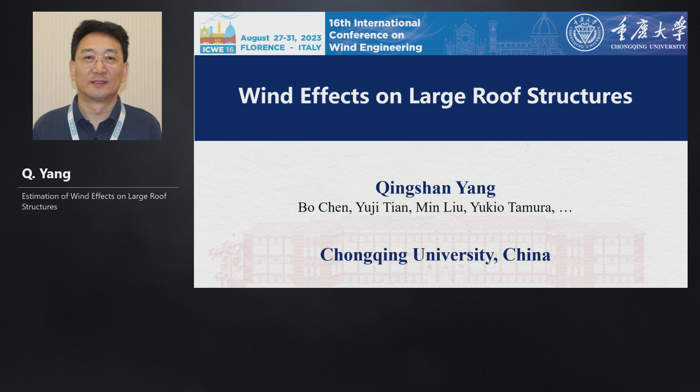The presentation will include 5 parts. Now let's begin from the background.

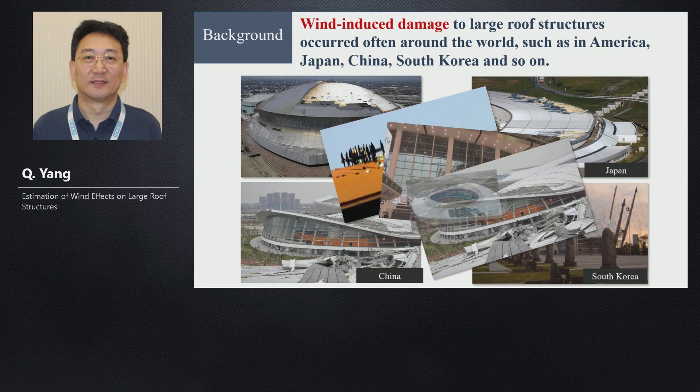Large roof structures such as sport venues, transportation hubs, and exhibition centers are widely built around the world. Wind-induced damage to this kind of large roof structure occurred often around the world, such as in America, Japan, China, South Korea, and so on.

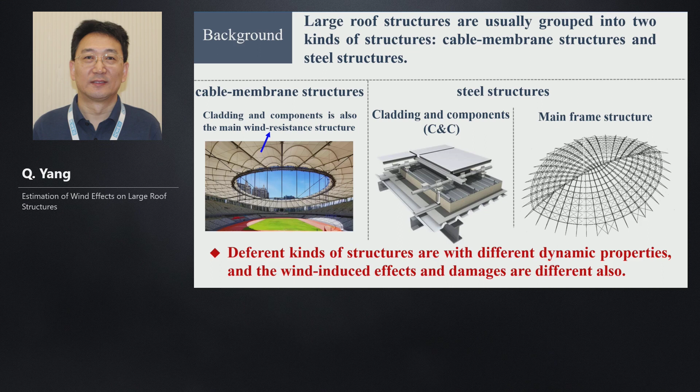Large roof structures are usually grouped into the cable membrane structure, which is a flexible, soft structure, and steel structures. The steel structure usually includes 2 parts: one is the cladding and components, and the main frame structures. Different kinds of structures have different dynamic properties, and the wind-induced effects and damages are different also. I will show you all of them.

The cable membrane structure is prone to be damaged by strong wind, and progressive damage usually occurs. It's believed that wind-structure interaction is a significant factor for the damage of the membrane structures, as it has low stiffness.

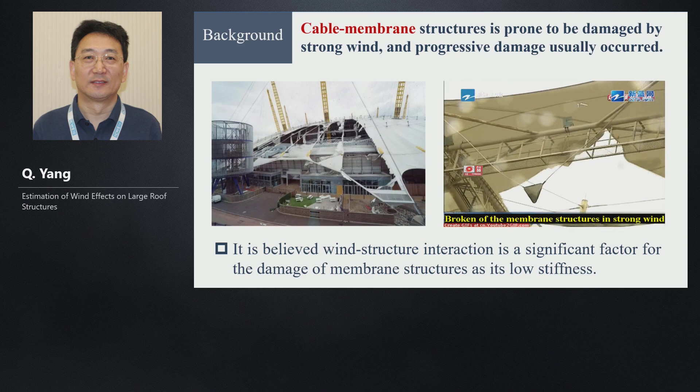For the roof cladding and components, wind-induced damage is very common, actually also very heavy. It's the main concern of the engineers. Wind-induced dynamic effect of the claddings can be ignored due to the high stiffness of the small-sized force-bearing unit.

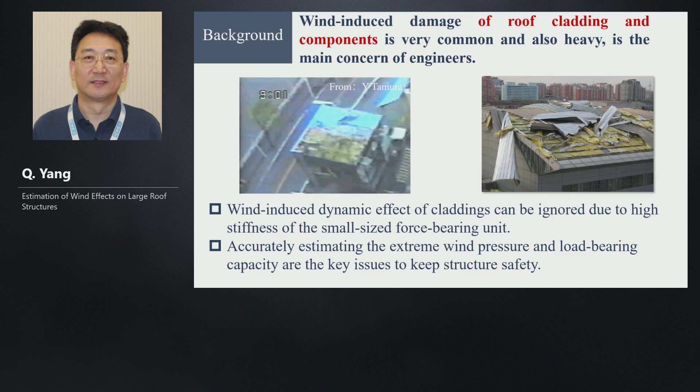So accurately estimating the extreme wind pressure and the load-bearing capacity are the key issues to keep the structure safe. For the main frames, the damage feature of this kind of roof is the over-limit vibration and sometimes even collapse. Wind-induced vibration effect needs to be considered in the design, and the design wind load is usually expressed as equivalent static wind load.

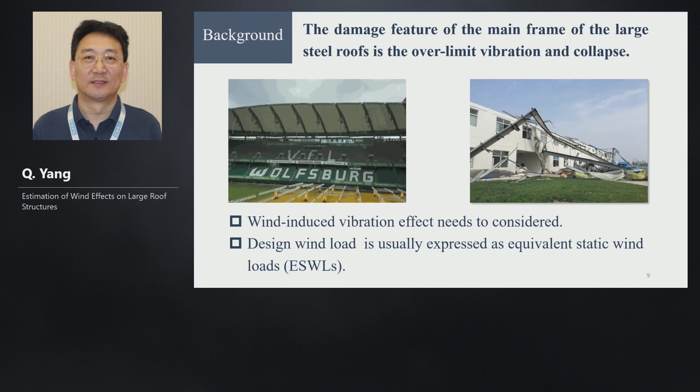From the background, we think there are some key issues that should be solved. Aeroelastic tests showed that the wind-structure interaction may lead the response to a sudden dramatic increase and modal jump. The underlying mechanism of the wind-structure interaction effects hasn't been cleared yet, and analysis methods haven't been found to be reported either.

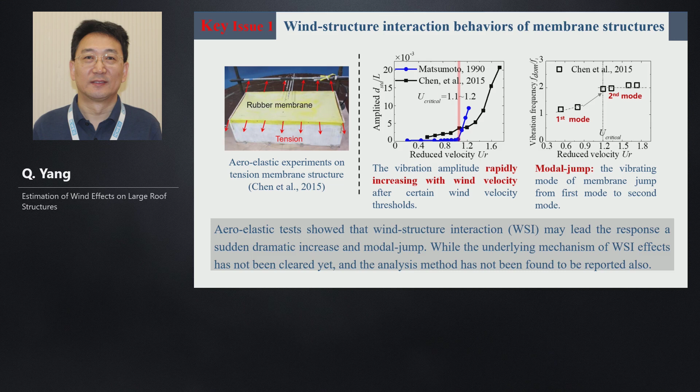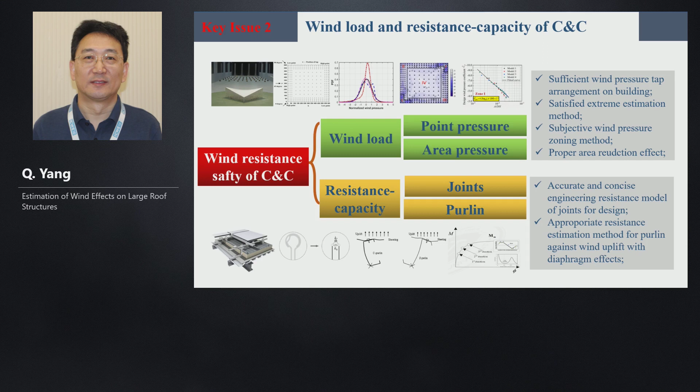For the claddings and components, to keep them safe, we should let the resisted capacity be larger than the wind load. For the wind load, we should examine or estimate the point pressures and the area pressures. For the resistance capacity of the cladding and the components, the main concern is the joints and the purlins.

For the point wind pressure, the extreme value of the point wind pressure, the layout of the pressure taps in wind tunnel tests needs to nicely capture the characteristics of the flow. Pressure taps are often arranged subjectively by experience in our wind tunnel tests, while quantitative criteria are needed for checking the rationality of the pressure tap arrangement and to reduce the pressure gradient of adjacent taps.

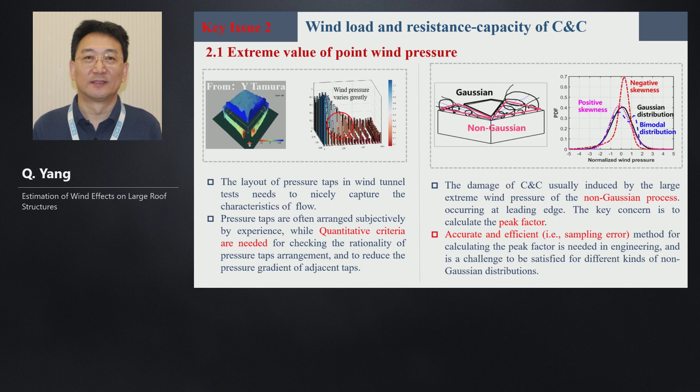The damage of the cladding and components is usually induced by the large extreme value of the wind pressure of the non-Gaussian process occurring at the leading edge, and the key concern is to calculate the peak factor. An accurate and efficient method for calculating the peak factor is needed in engineering and is a challenge to be satisfied for different kinds of non-Gaussian distributions.

For the area wind load of the cladding and components, the extreme wind pressure over all directions should be considered for the wind load on the claddings, which is usually especially unevenly distributed. An objective zoning method is desired to balance the safety and the cost.

Extreme wind pressure of the adjacent taps vary greatly with a big gradient occurring at different times. Both the correlation and the gradient should be considered for the area-reducing effects, while the influence of the gradient hasn't been studied enough so far, I think.

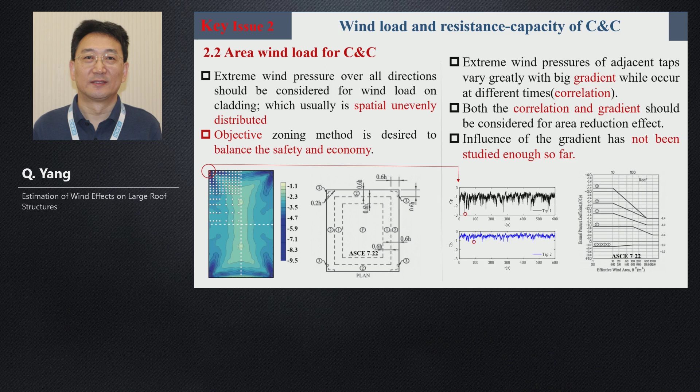For the wind resistance capacity, the metal envelope system is extensively utilized in large roof structures for its excellent waterproofing and convenient construction, etc. The claddings usually are composed of multiple layers of components and C or Z sectional purlins with complicated connections.

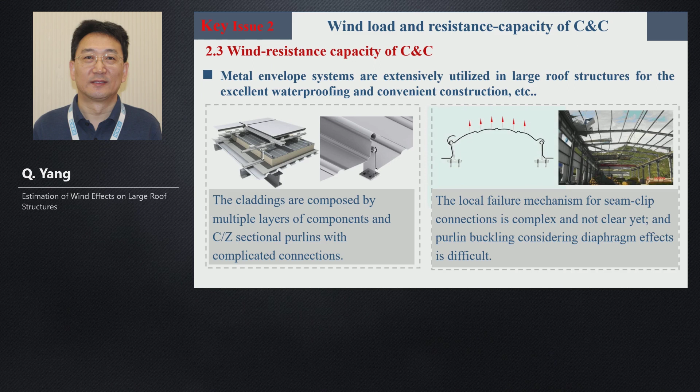So the local failure mechanism of the seam and clip connections is complex and not clear yet, and the purlin buckling, considering the diaphragm effects, is also difficult for engineering design.

For the main frame structures, there are many kinds of structures. Their characteristics of wind-induced response are much different, as their dynamic properties have a big difference, such as for the flat roof. For the flat roof, usually they have one dominant mode. For the cylindrical roofs, usually there are two dominant modes.

But for the dome roofs, we call it three-dimensional space structures. Each mode gives only a small contribution to the response. There are many modes that give contributions, so it's difficult to find the dominant modes. So a method analyzing wind-induced response of this kind of space structure is desired.

For this kind of space structures with low stiffness, low damping, and vibration with multiple modes, the dominant mode may appear in the higher order. Even the dominant mode gave a very small contribution—for this case, it is only 5%. So traditionally, the higher order modes are easily overlooked. It's necessary to select the dominant vibration mode to calculate the wind-induced response with high efficiency.

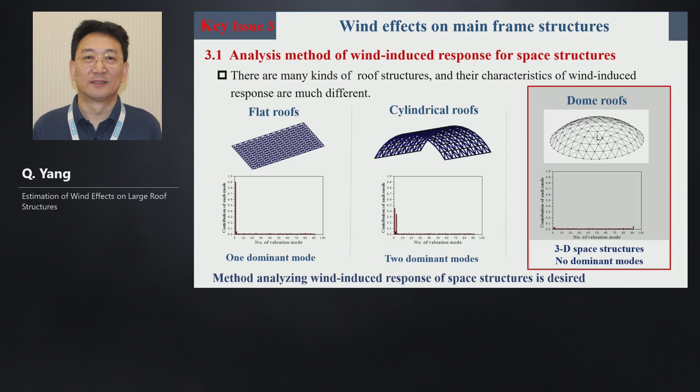Yeah. Next is for the equivalent static wind load. Sorry.

This is for the equivalent static wind load. The number of equivalent targets of the space structures is usually big, and the number of equivalent static wind loads are also big, which makes the engineering design very inconvenient if the single target equivalent static wind load method is adopted. So the universal equivalent static wind load is needed very much for large space structures.

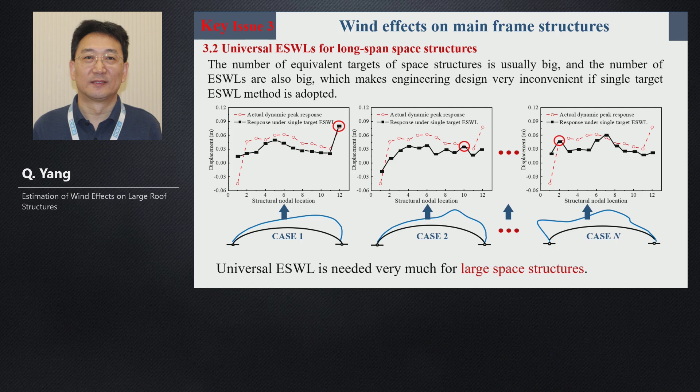So I will, in the following three sections, focus on these issues one by one. First, I will introduce wind structure interaction of membrane structures. To reveal the interaction mechanism of wind and membrane structures, the aeroelastic appearance is accurately reproduced by fully coupled numerical simulation. The wind-induced response of the tension membrane is accurately simulated, and the mode jump phenomena of the membrane structure is also reproduced in the CFD analysis.

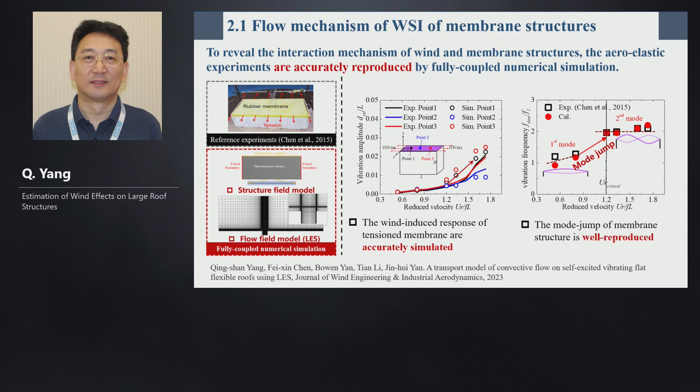From the CFD analysis, it is found that when the wind load or wind velocity is low, the shedding and convection of the vortex above the membrane surface are stochastic and irrelevant to the vibration itself. But when the speed increases, after the mode jump occurs, the vortex shedding becomes resonant with the vibration, and the vortex convection is synchronized with the uplift motion. Yeah, maybe you can see that.

This point always, the vortex coincides with the uplift of the membrane motion. That indicates that the wind-induced vibration of the membrane structure is a kind of vortex-induced vibration.

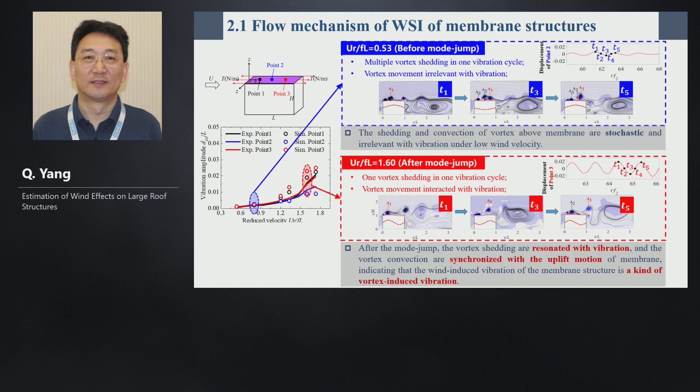Furthermore, the wind structure interaction effect of three-dimensional membrane structure is also analyzed. From the result, it is shown that the wind pressure in the middle area is significantly increased due to the existence of the wind structure interaction effect, which is much bigger than in other areas.

The separated vortex, which formed at the leading edge above the rigid structure, may shift toward the middle or trailing zone for the vibrating structure. This is the reason that caused a notable increase in the wind pressure.

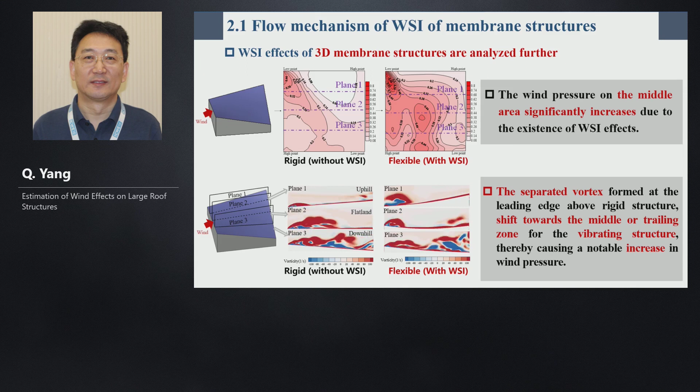To establish the wind-induced response analysis method considering this kind of wind structure interaction effect, the motion-induced aerodynamic forces should be identified. This kind of motion-induced aerodynamic force, as all of you know, is usually expressed by the aerodynamic force, damping, and stiffness. The aerodynamic damping and aerodynamic stiffness may be identified based on the forced vibration method.

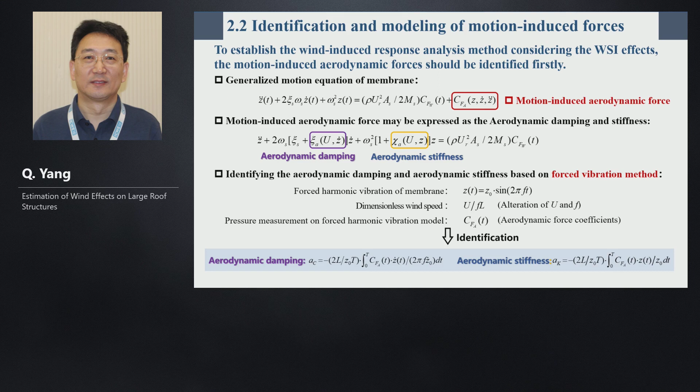This is the result of the identification. We can see that the aerodynamic stiffness is constant at a given reduced wind velocity, with no relation to the response. Correspondingly, we call this a linear aerodynamic stiffness force, which can be directly substituted into the motion equation. The aerodynamic damping is positive at lower reduced wind velocity, which will decrease to negative at higher reduced wind velocity. So the aerodynamic damping is a nonlinear function of the amplitude.

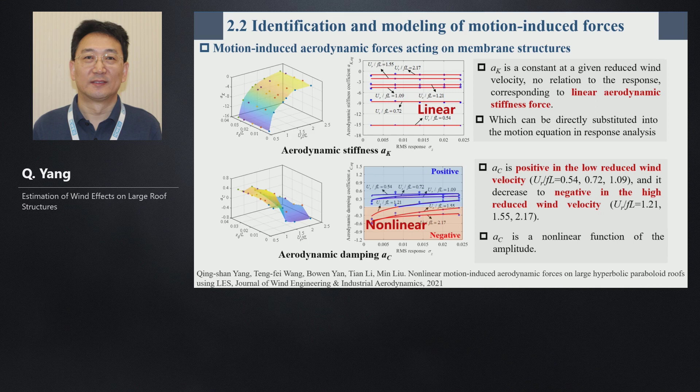To analyze the structural response, an appropriate model describing the nonlinear relationship between the aerodynamic damping and the structural response is needed. It is found that this kind of nonlinear aerodynamic damping may be modeled by the generalized van der Pol model, proposed by our group.

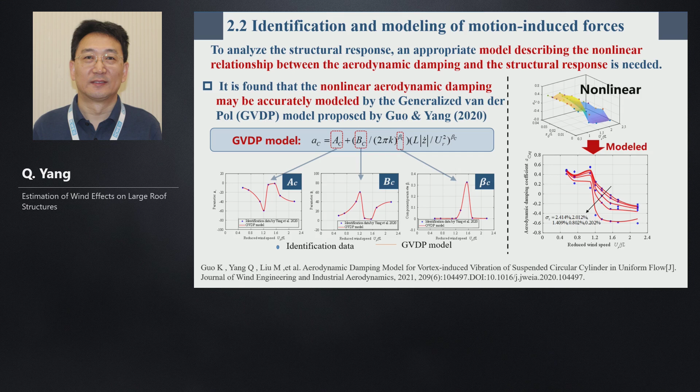The response of the membrane structure with nonlinear aerodynamic damping is usually unsolvable, but we can transfer it to a solvable nonlinear system, such as the FPK function. If we do so, we can obtain the probability density function of the structural response. If we get the PDF, then the standard deviation, kurtosis, peak response, and peak factor can be calculated.

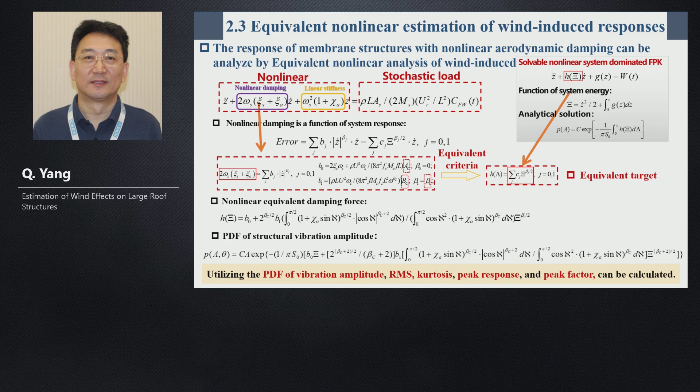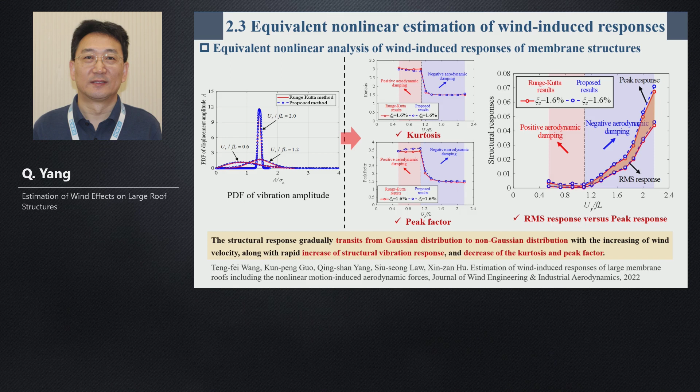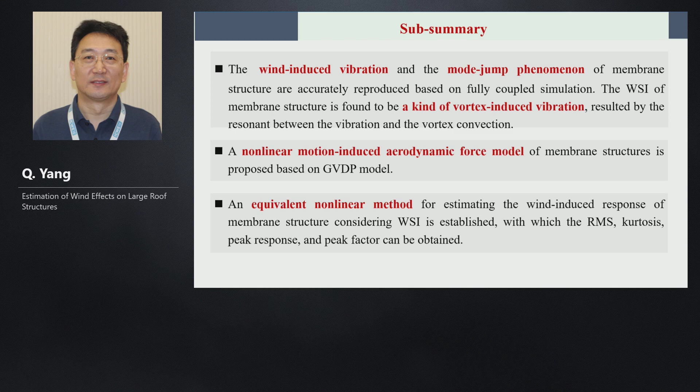This is what we have done on membrane structures. I want to give a short summary. The wind-induced vibration and mode-jump phenomenon of the membrane structure are reproduced based on the fully coupled simulation. The wind structure interaction of the membrane structure is found to be a kind of vortex-induced vibration. A nonlinear motion-induced aerodynamic force model of the membrane structure is proposed based on the generalized van der Pol model. An equivalent nonlinear method for estimating the wind-induced response of the membrane structure, considering wind structure interaction, is established.

This kind of research result we applied to some engineering projects. Actually, we directly did the consulting work for more than 30 membrane structures, including some important and large projects.

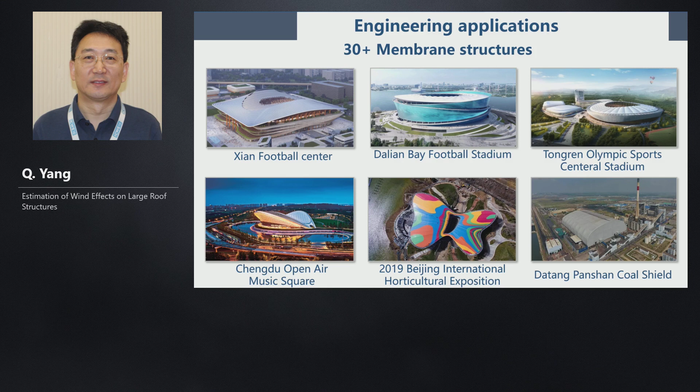Next, we go to the cladding and the components.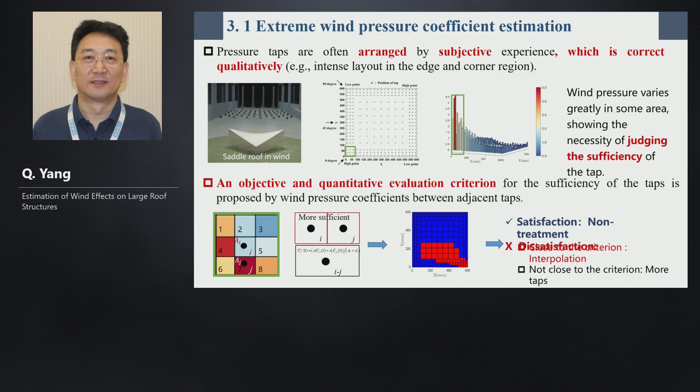For the part that can be interpolated, the kriging method and the POD method, for example, can be applied respectively to interpolate the mean wind pressure coefficient and the fluctuating wind pressure coefficients. For the interpolation, an adaptive interpolation method is developed to arrange interpolation points according to the wind pressure difference between the adjacent taps, to meet the sufficiency requirement of the pressure points. Here we show some of the results.

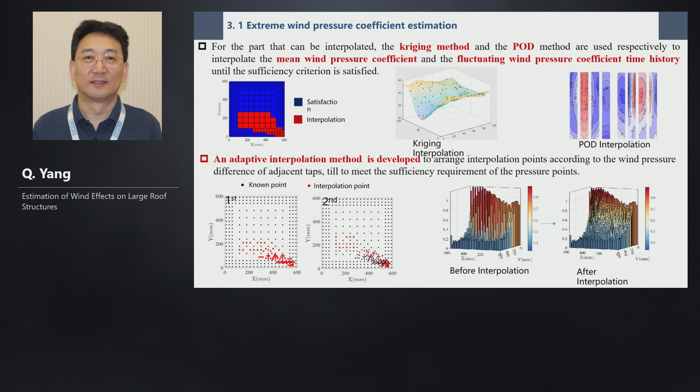After we get the time history of the wind pressures, the extreme value of the non-Gaussian wind pressure coefficient can be estimated by type 1 or type 3 distribution. If the time history is long enough, more efficient ways with a short time history are also proposed by pioneer researchers.

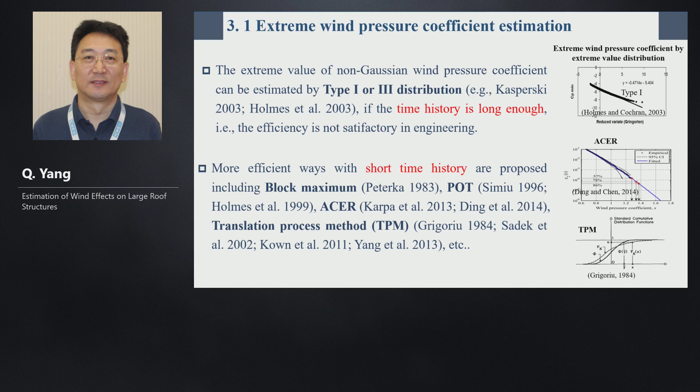The translation process method based on the peak factor of Gaussian process is widely applied. The moment-based Hermite model of the translation process method, based on the first 4 moments, has been widely studied. Its accuracy sometimes, in some cases, is not satisfied, and the sampling error exists but is not known yet.

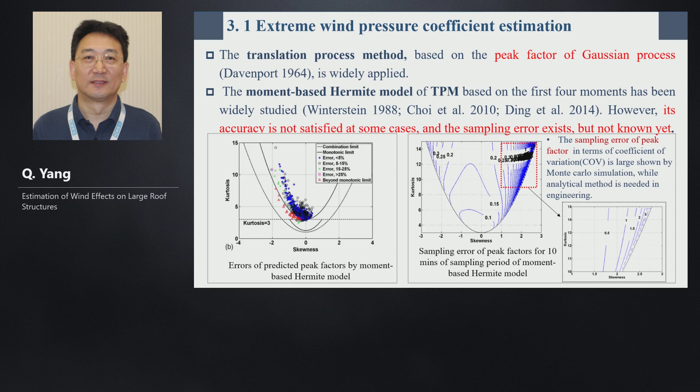So we did some further analysis on the PDF of the pressure process. We find the tail, because we concern the extreme value, so the tail of the probability density is very important to us, is sensitive to the skewness in different ways for the left and right side tails. When the skewness is less than 0, the skewness will control the right tail, and the left tail is not sensitive to it. When the skewness is bigger than 0, the skewness controls the left tail, and the right tail is not sensitive to it.

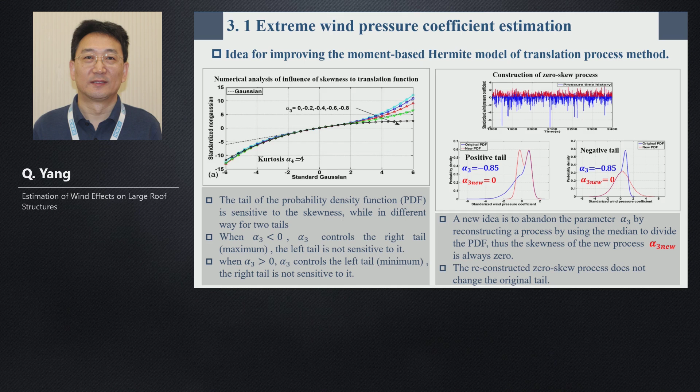So after this kind of consideration, the idea is to abandon the parameter skewness by reconstructing a process, using the median to divide the PDF. Thus, the skewness of the new process is always 0. The reconstructed zero-skewed process doesn't change the original tail property. If we use the newly constructed process, we can get a much better result compared to the original process.

This is the error by the original process. They have a big error in this area. This is for the reconstructed process. The higher errors are eliminated, and all of them have a great improvement.

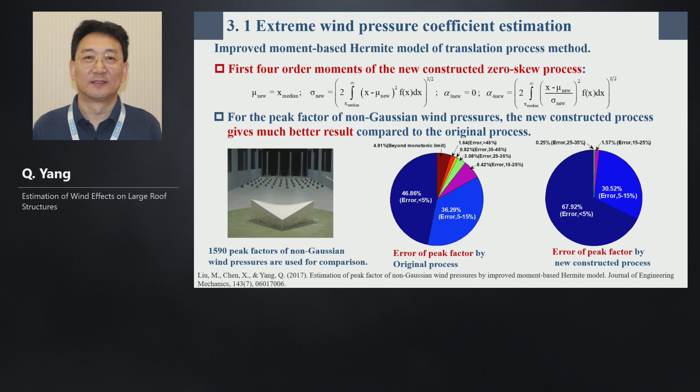For the sample error of the estimated peak factor, it may be represented by the coefficient of variation of the peak factor. Actually, traditionally, the controlling parameters were given only for white noise process. But the pressure process is not white noise, it is correlated. So we propose a method for determining the control parameters for this kind of wind pressure process, considering the autocorrelation.

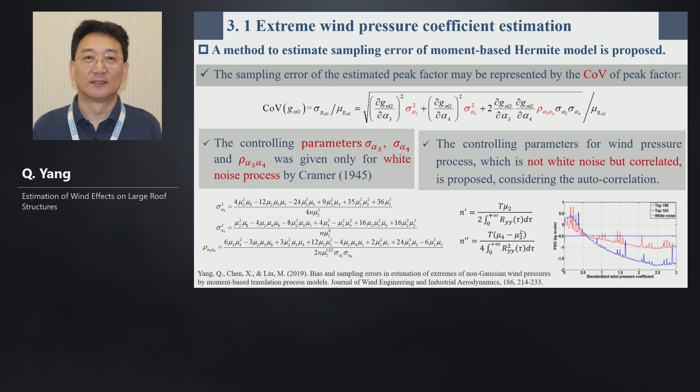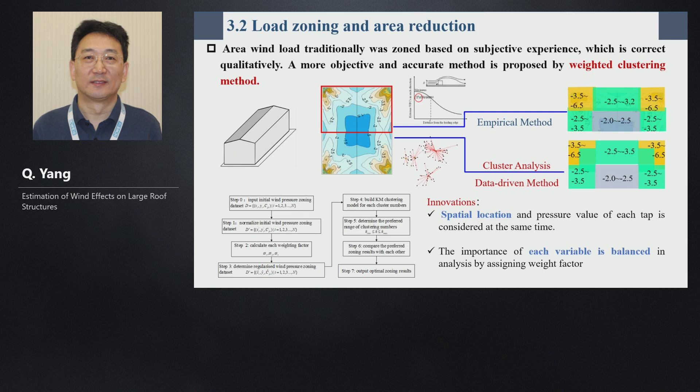Compared to the empirical zoning method, the proposed method may give objective results quantitatively for both simple and complicated pressure distributions.

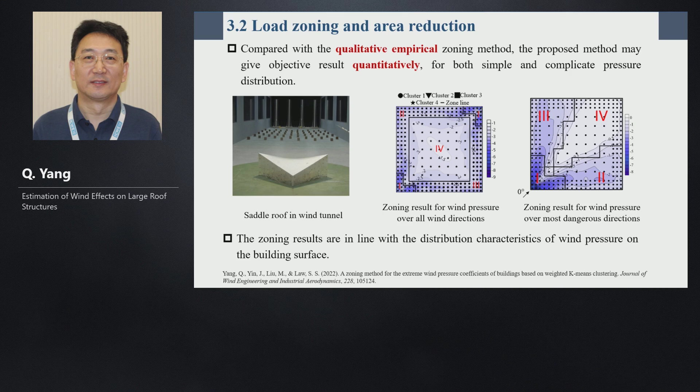The influence of both the gradient and the correlation of the pressure on the area reduction effect can be effectively taken into consideration by interpolation. The procedure is the same, but using a more dense pressure value gives a more accurate result.

This slide shows an area reduction curve, which differs with and without this kind of interpolation. It is found that the traditional method underestimates high pressure in some small areas, and overestimates low pressure for the big areas. This leads to a very bad design, which is expensive and sometimes also dangerous. So using interpolated data is very important, we think.

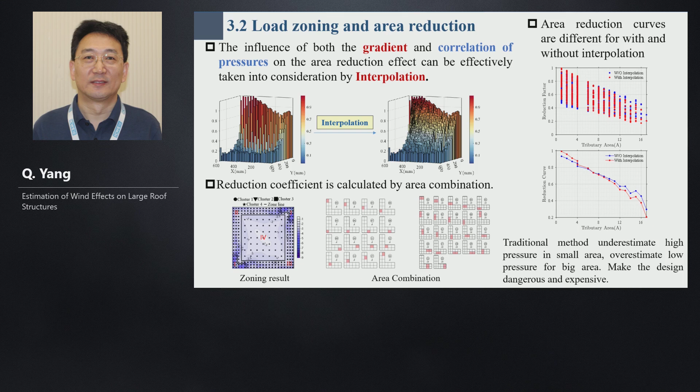For the resistance capacity of the joints of roof claddings, the wind-induced pull-out failure of the standing seam metal cladding system is sketched in this figure. It is shown that the seam clip connection is the most susceptible part to the wind uplift effect, and there are two failure modes: the seam clip failure and the seam-to-seam failure.

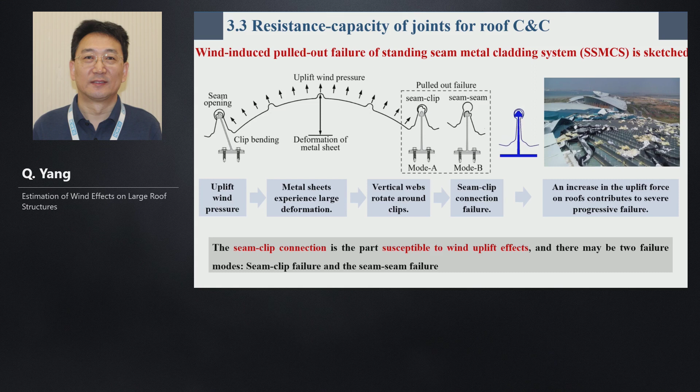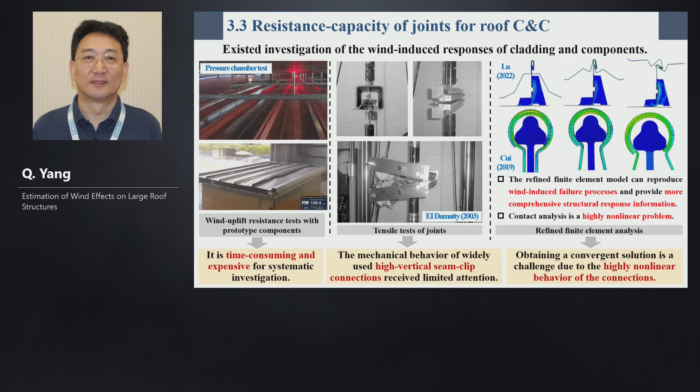There are many researchers and investigations on this kind of wind-induced response of cladding and components, through pressure tests, wind tunnel tests, joint tests, and also refined finite element analysis. But we think there's still some work that needs to be done.

An equivalent spring model was developed for this kind of cladding to simplify the highly nonlinear contact boundary condition, based on the pull-out failure mechanism. The developed model, comprising continuous rotational and horizontal springs, was employed to simulate the mechanical performance of seam and clip connections.

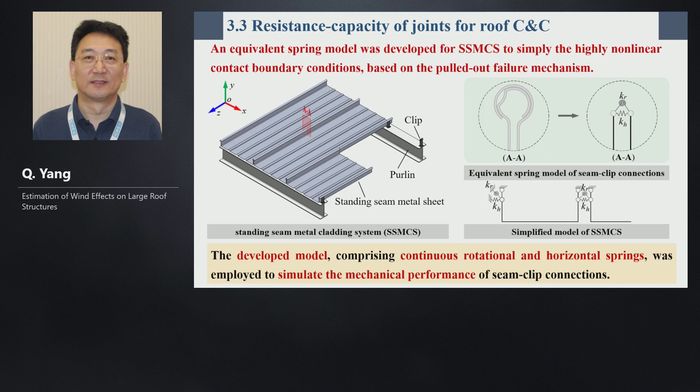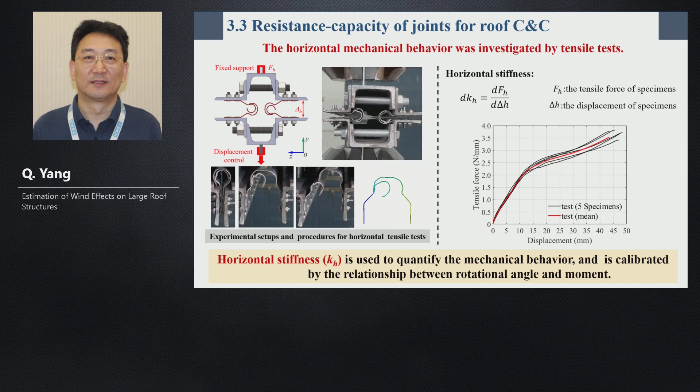Here we get the horizontal mechanical behavior by tensile tests. By this kind of test, we can determine the horizontal stiffness, which can be calibrated through the relationship between the rotation angle and the moment. In the same way, we can also get the rotation stiffness.

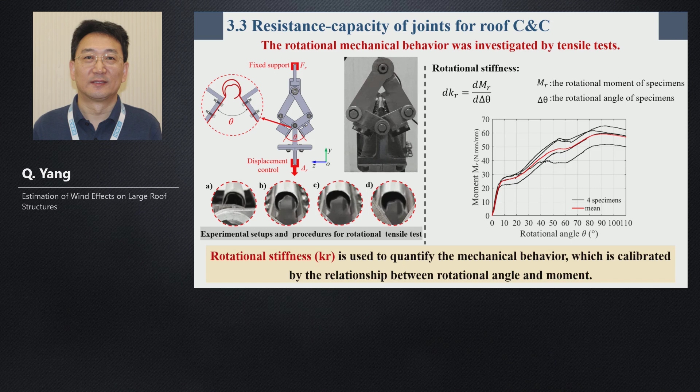The equivalent spring model of the seam clip connection was validated by substructure tests. From the tests, it is confirmed that the developed model for evaluating the structural response of the system is feasible and accurate.

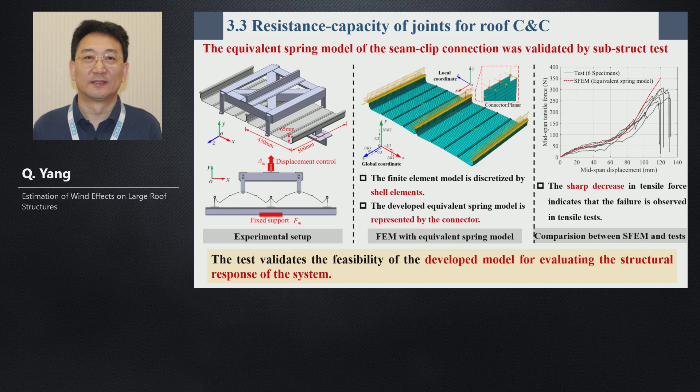Next, we want to determine the controlling parameter of the pull-out failure of this kind of structure. The seam clip failure mode is caused by the high reaction force of the clip, which can be identified as the controlling parameter of the seam clip failure. For the seam failure mode, it is caused by the large rotation deformation of the web, which is the controlling parameter.

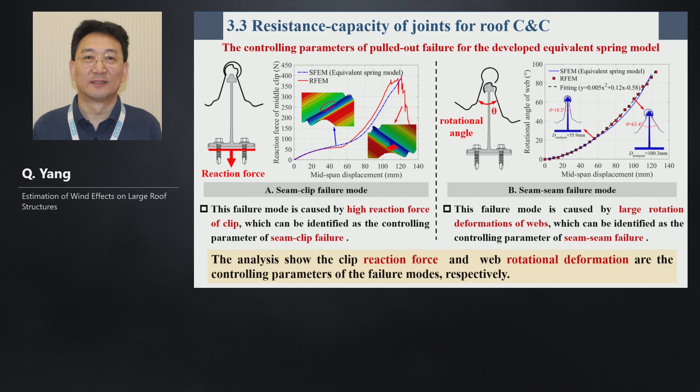After the metal sheet receives the wind pressure, it is transferred through the metal sheet to the purlins, the components of the roof. These purlins usually use C or Z sectional components. The buckling model of this kind of purlin should consider the diaphragm effect under eccentric wind uplift. In previous studies, this concept was not accepted because the warping torsion effect was not considered.

So we derived a new equation for this kind of structure and this kind of wind load. The new differential equation considers the coupling of the load eccentricity and the diaphragm effect. The stress from bending plus warping torsion, and the local buckling mode, are obtained.

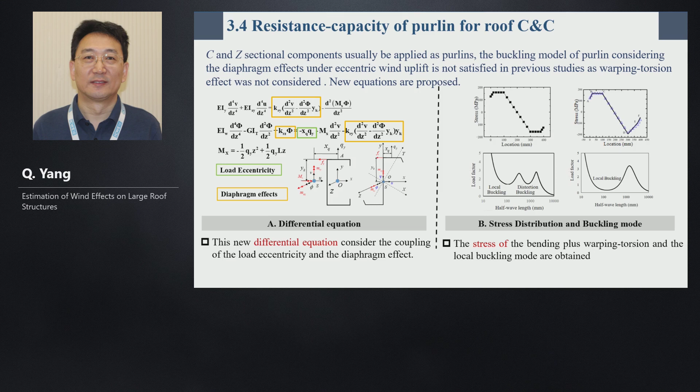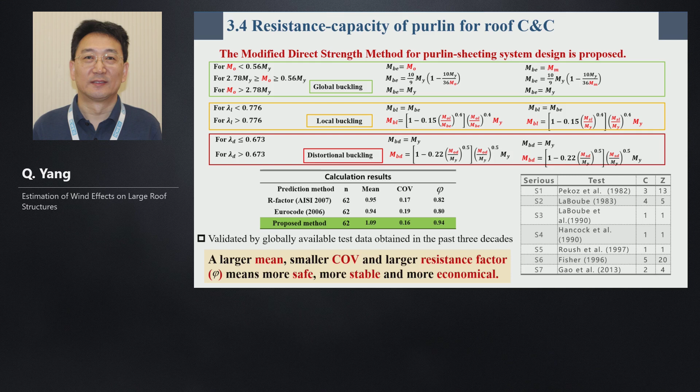After getting this research result, we transferred it to a design method. So the modified direct strength method for the purlin sheeting system design is proposed. Here we give some formulas, which I will not explain further. This formula was validated by globally available test data obtained over the past 3 decades, to make sure the design method is accurate and safe.

Now we give a summary about cladding and components, and extreme wind pressure coefficient estimation. In this part, an objective quantitative criterion for gauging the sufficiency of wind pressure taps was established, and an adaptive pressure interpolation method was proposed, along with piecewise moment-based Hermite interpolation, a sampling error estimating method, and advice on the minimal test period.

For area loading, an objective load zoning method was proposed, along with an area reduction method considering both gradient and correlation. We also studied the resistant capacity of the roof and its components, and established the equivalent spring model.

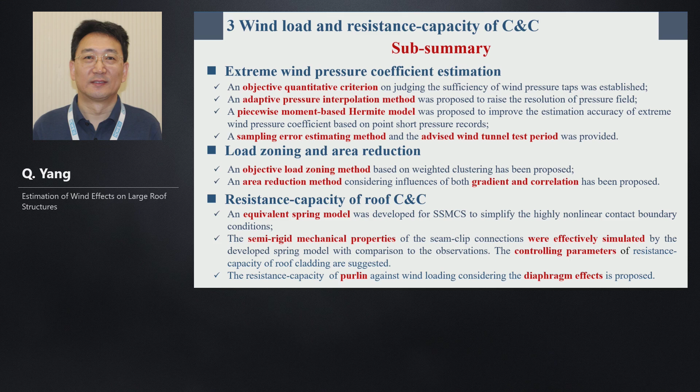Now we move on to the main frames of the roof structure. As we mentioned, it is necessary to take into account many vibration modes to calculate the response. The mode contribution depends on the correlation between the loading and the vibration mode.

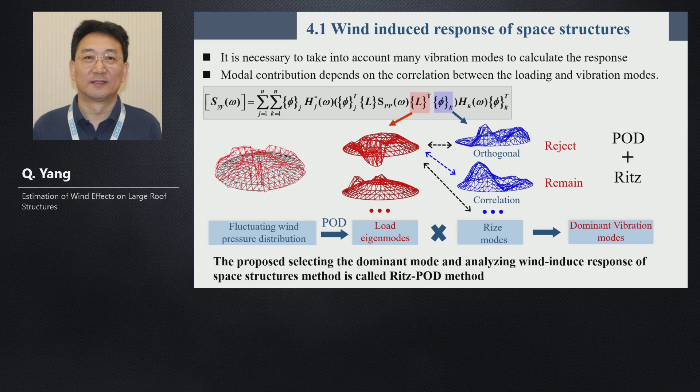So we use the POD method to decompose the fluctuating wind pressure into load eigen modes, and check the correlation between the load eigen mode and the vibration modes. If their correlation is strong, that will be the dominant vibration mode. So we propose selecting the dominant modes and analyzing the wind-induced response of this kind of space structure, called the Ritz-POD method. We applied this method to this kind of dome structure.

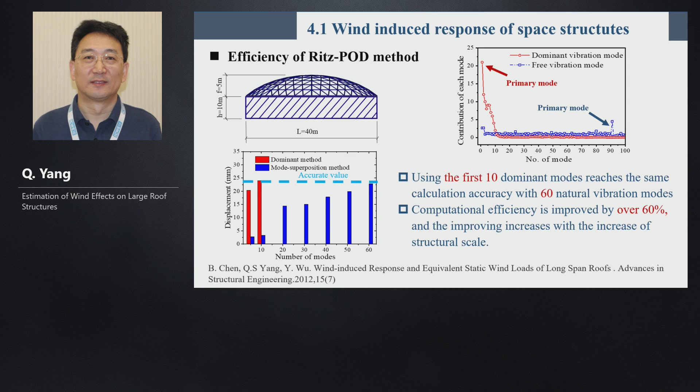Next, for the space structure, we consider the universal equivalent static wind load. Many modes contribute to the response, and the dynamic response at each point usually does not reach the extreme value synchronously.

Universal equivalent static wind load is needed for improving design efficiency, as mentioned before. The method of calculating universal equivalent static wind load for space structures is proposed based on the dominant load eigenmode and the structural mode, following the work of Professor Tamura. Here, the fundamental distribution is composed of the eigenmode and the modal inertial force.

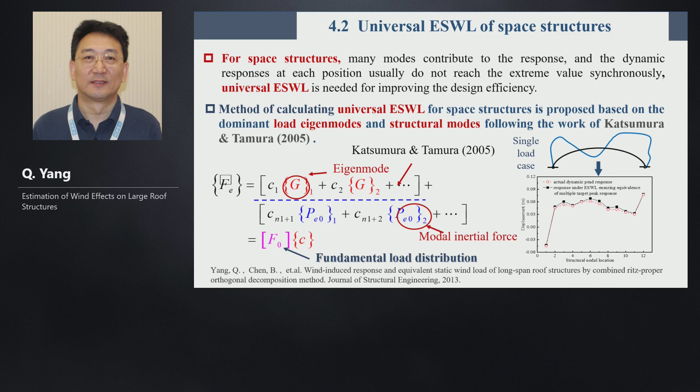For this case, the universal equivalent static wind load for multi-target load effects can be expressed by this first equation, and the response of the universal equivalent static wind load should meet these equations. The response of the universal equivalent static wind load should be the multiple dynamic peak response.

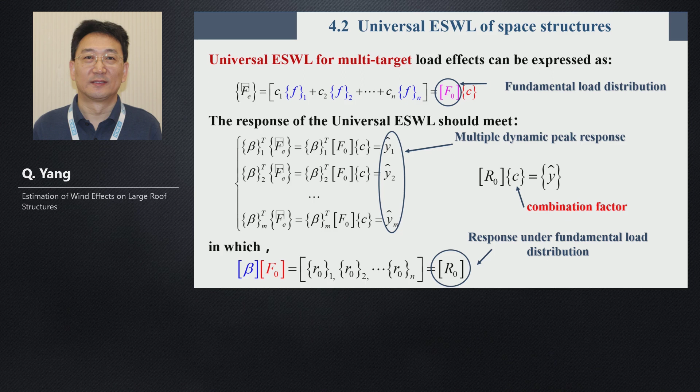What we want is to get the combination factor, which can be obtained by this equation. But usually the combination factor has only a least square solution. Anyway, we can get the combination factor. After that, the universal equivalent static wind load is obtained. When we calculate the response, we should also add the mean wind load.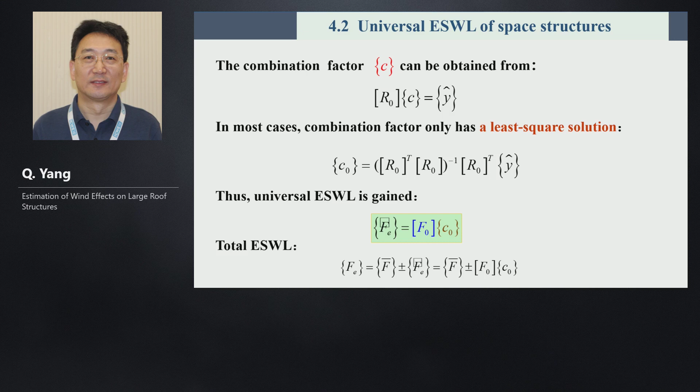We use this method on many different kinds of real structures. This Olympic Sports Center has members totaling 16,000. We use one universal equivalent static wind load to reach the peak response of these 16,000 members. For the second one, this is another structure.

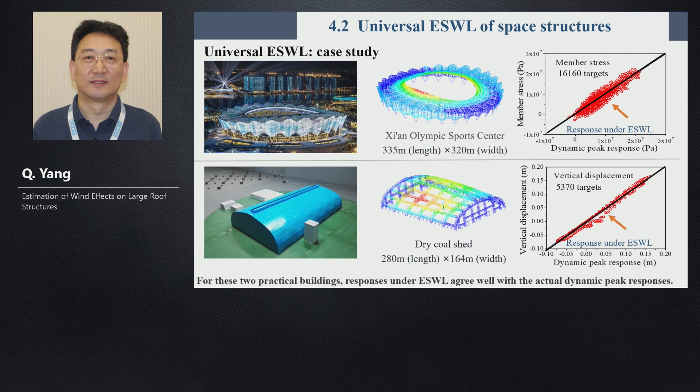We give the effect of the displacement. It shows that the accuracy for displacement is better than for member stress in member structures. From these two practical buildings, the response from the equivalent static wind load agrees well with the actual dynamic peak response.

As mentioned before, for large roofs we can use many different kinds of structures. Even for the same shape, like a flat roof, we can use a beam, a truss, or a spatial truss - different kinds of structures. And for cylindrical roofs, you can use arches or shells. Both can reach the design for different kinds of structures.

So we did some parameter analysis for these kinds of structures, especially for mean velocity, wind direction, spans, rise-span ratio, and roof mass. We studied over 2,000 cases. We got some empirical results.

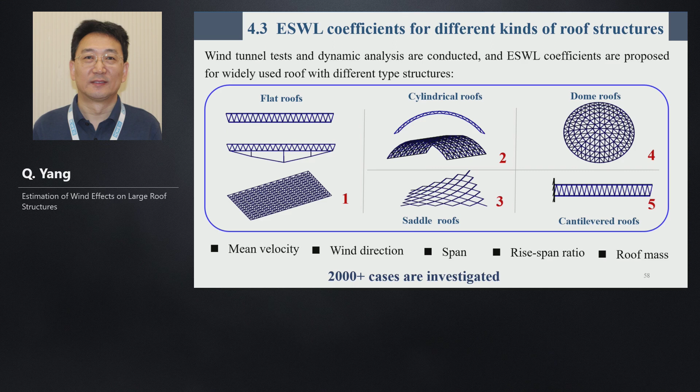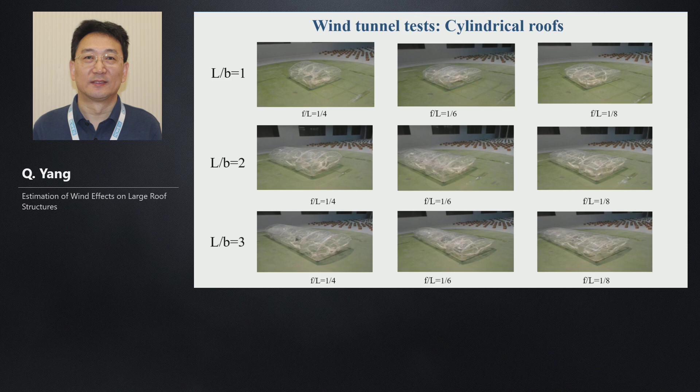Here are some pictures for the wind tunnel test for the cylindrical roofs. Here, L is the span, B is the length - the aspect ratio - and F is the rise span, the height of the rise, and L is the span. This is also for the dome structures.

After the numerical analysis, we can get the wind load for different kinds of structures. For plane trusses or beams, the first part we give is the mean wind load. The second is the equivalent static wind load, which can use this formula.

Here is the amplitude, which is a function of the reduced frequency, defined by the first mode frequency, the roof span, and the incoming mean wind speed. We analyze different kinds of wind direction, and for the structure, if in different parts, they may have different parameters.

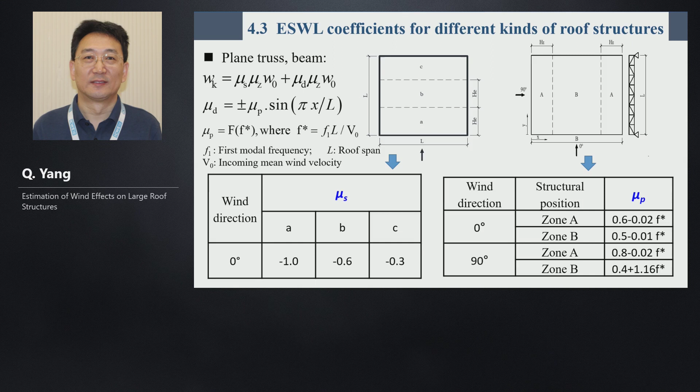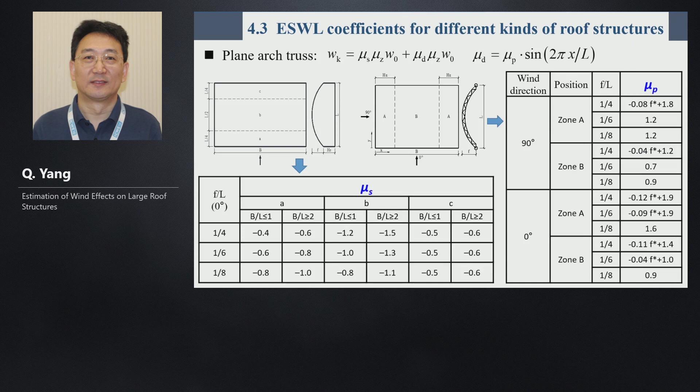This is the result for plane trusses and beams. In the same way, you can obtain results for flat spatial trusses, and plane arch trusses can be used for arch roofs, and this kind of analysis for cylindrical shells, and also for dome shells and lattice shells.

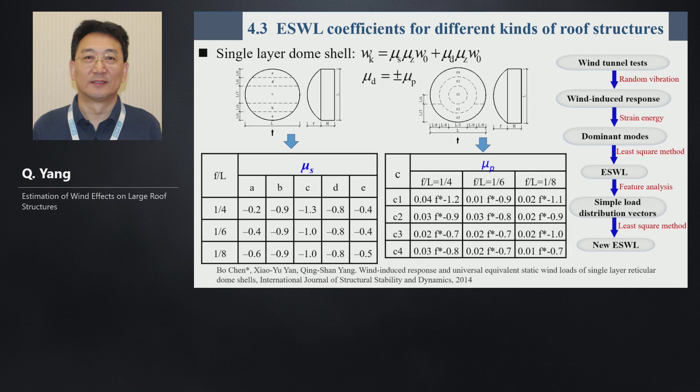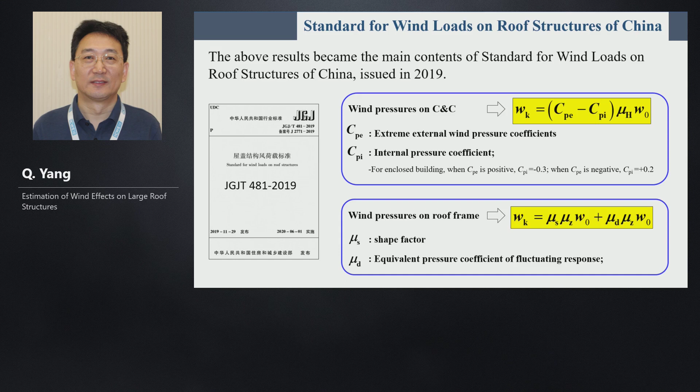The above results become the main contents of the standard for wind load on roof structures of China, which was issued in 2019. In this standard, we give the extreme external wind pressure for cladding and components for different shapes of roofs, and also give the universal equivalent static wind load for roof structures or frame structures for different kinds of shapes and structures.

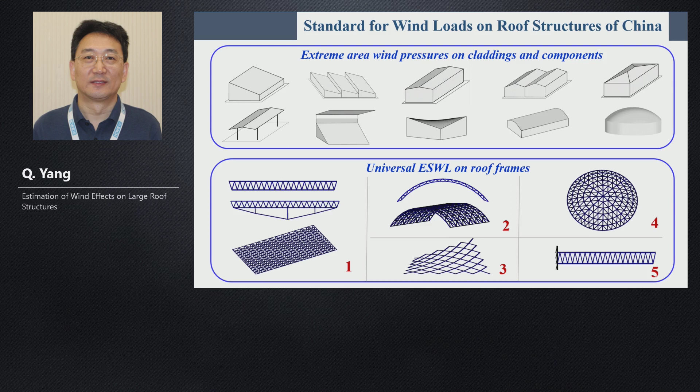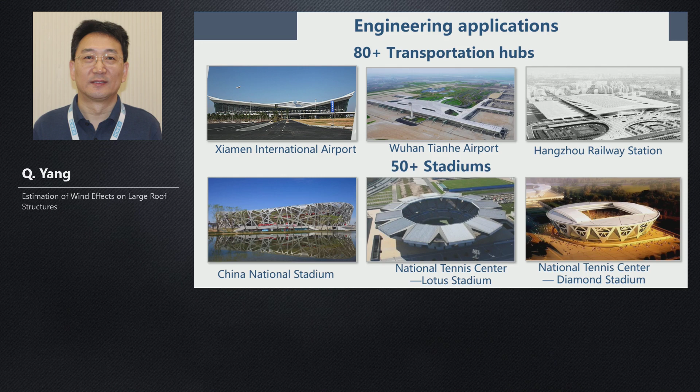During the years we also were involved in many engineering projects about transportation hubs and stadiums. If you join ICWE16, you may visit this structure, the China National Stadium, and some others - all in the Olympic Park. This structure is also in the Olympic Park, and also many exhibition centers. We also do some international projects outside of China, overseas.

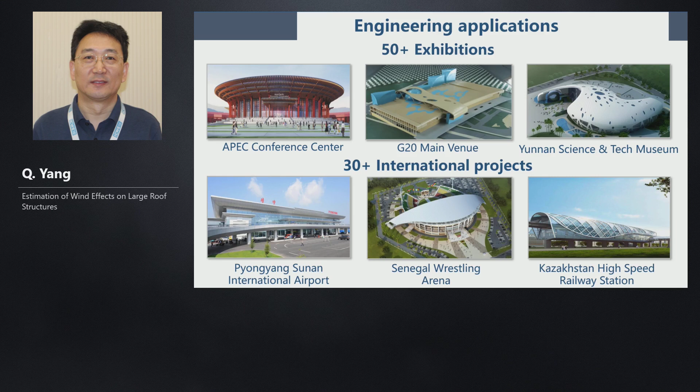I want to go to the brief summary. The wind-structure interaction of the membrane structure analysis: a non-Gaussian extreme wind pressure evaluation method and a zoning method based on clustering are proposed. A simplified calculation model of the metal enclosure system is proposed. An efficiency analysis method for multi-mode wind-induced vibration response and the universal equivalent static wind load analysis method are proposed. For typical roof structures, calculation charts of extreme wind pressure of cladding and components, and universal equivalent static wind loads of the main frames, are given for design. These are included in the China standard for roofs.